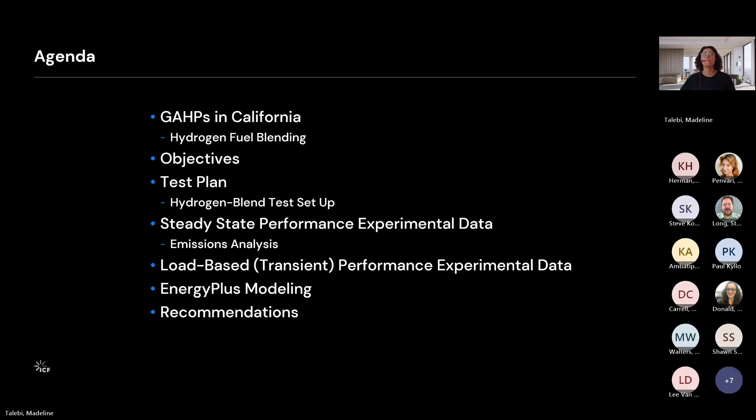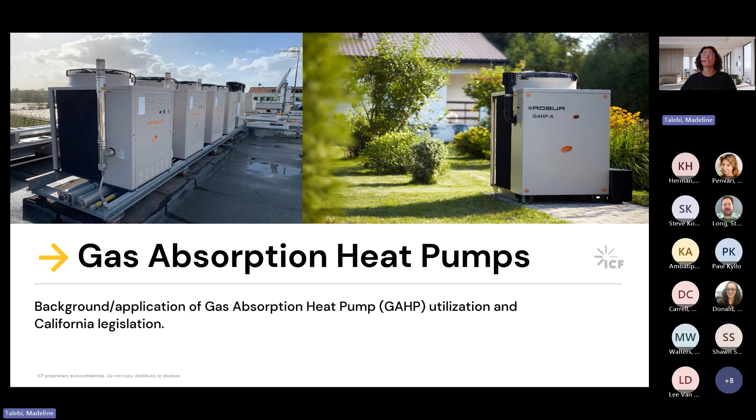So if we look at California on emissions control, why we're interested: if we look at water heating, it is the largest non-industrial end use of natural gas in California. I've broken down natural gas consumption by end use, covering the three sectors: industrial, commercial, and residential. As you can see, industrial has the largest impact, however commercial and residential still have a significant impact in that space, where there could be lower consumption possibilities.

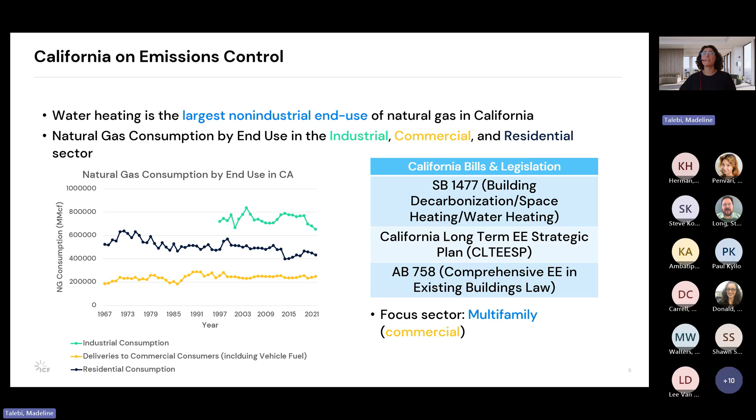And I listed a few California bills and legislation that would lead us to want to decarbonize or lower natural gas consumption in California, along with why we're interested in the focus sector being multifamily or commercial, to spearhead some of this effort, and why we would want to incorporate this into the multifamily sector specifically. I won't go into the details of these bills and legislation, but if you're interested in looking more into them, I have them listed here.

And so when we talk about hydrogen blending, I don't want to make any assumptions. So if I say a hydrogen blend of 5%, that means it's 5% hydrogen and the balance 95% is natural gas.

When we look at hydrogen blending research going on, specifically in California or Southern California, there are some limitations with regards to hydrogen blending, primarily associated with cost. There are several ways that you can harvest or generate or extract your hydrogen, and some are more costly than others. But that research is definitely ongoing as we're looking more towards hydrogen as a feasible fuel option or fuel substitute.

I listed here some on-site max hydrogen blending across various regions, just to give insight into where the world is in this level of research. The US excluding Hawaii is at a max blend of 5%, Hawaii only is at 15, Canada's at 5, Europe's at 20, kind of the leader in this effort, and Australia's at 5. This is from the CPUC, California Public Utility Commission, from 2022, so this might well have been updated, but all this to say that Europe is definitely the leader in this effort.

And through the GET program, we've actually done a study, one of the earlier studies in the program, looking at hydrogen readiness labeling, specifically in the European market. If you're interested in where that study went, that's also available on the website.

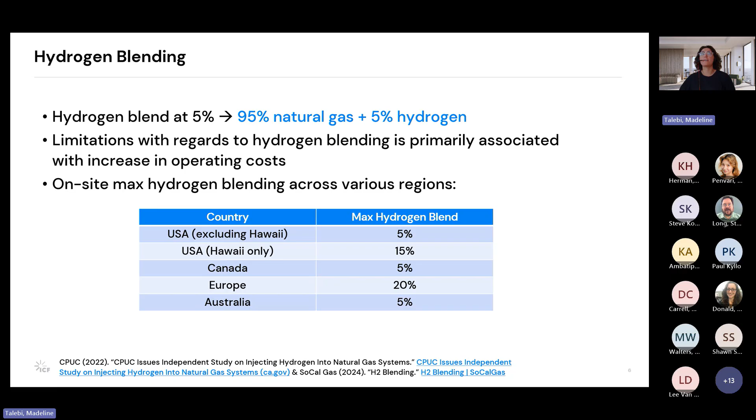Getting into the objectives, ultimately we want to improve low uptake at the sector level. As I mentioned, that's going to be the commercial sector. And we want to improve low uptake at the technology level, specifically in the GAHP space.

Looking at technology performance in a controlled environment, there are really two components of that laboratory study: the steady state performance and the part load or transient performance testing. Then ultimately, we want to look at how emissions will be evaluated with the various hydrogen fuel blends, and finally, developing performance mapping curves that will be contributed towards the EnergyPlus GAHP module.

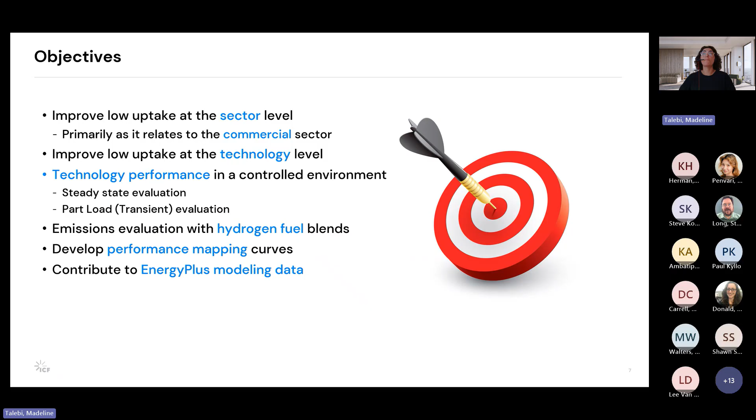I'll briefly touch on the equipment commissioning and test plan for this. Again, it's the Robur GAHP-A system. I've listed some of the commissioning tolerances used: anything that's a rate, so flow rate, firing rate, and heating output, are about plus minus 2%. Any temperatures, so outside air, return, and supply, are plus minus 1 degree Fahrenheit. Following commissioning of the system, everything was in good agreement with what the manufacturer had intended.

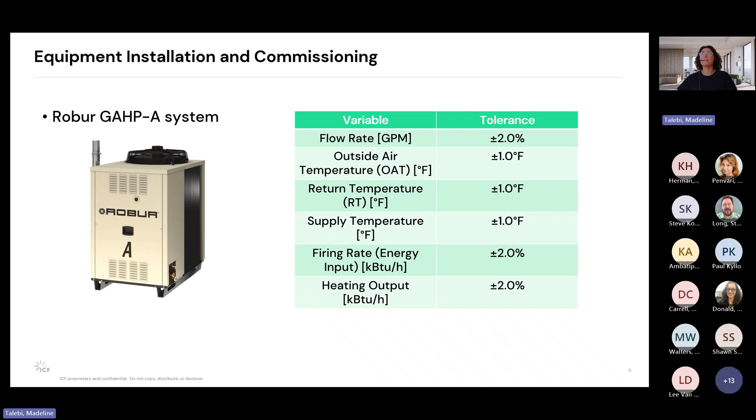For the steady state testing, as I mentioned, there was pretty thorough testing done for natural gas. Given time and resources, this was pared down to really hone in on where we might see some varying trends, or where the meat of the natural gas testing was the most interesting. So this was pared down to looking at one flow rate of propylene glycol at 13.6 GPM.

We used an outside air temperature range from 17 to 90 degrees Fahrenheit, 5 points within that range, and one return temperature at 110 degrees Fahrenheit. Propylene glycol was kept at a constant 35 volume percentage, and the hydrogen blend was between 0 and 30%, essentially looking at 4 points. The 0 volume percent was mainly for emissions, and the 10, 20, and 30 were for emissions and all of the steady state and transient testing.

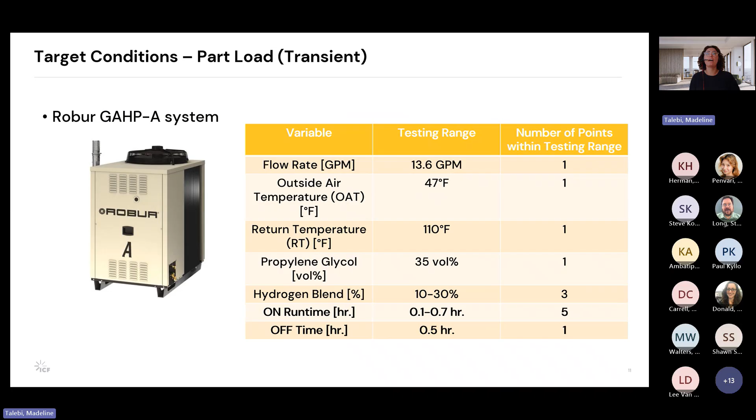For that transient testing, everything was kept constant, same as steady state, just adding that time factor. The on runtime of the cycle, at full fire, was between 0.1 and 0.7 hours, 5 points within that range. The off time was about 30 minutes, just one test point for the off time.

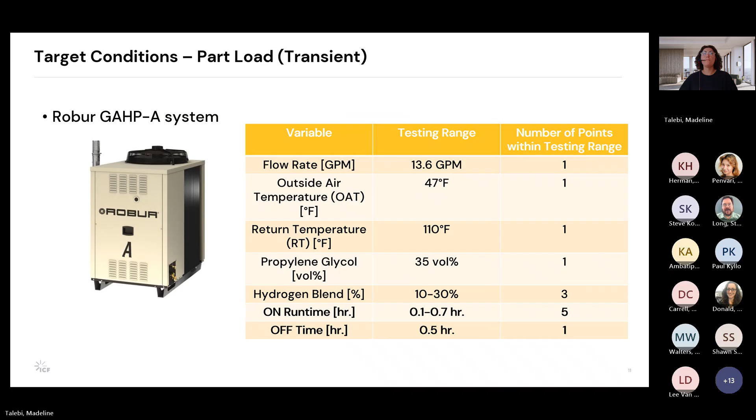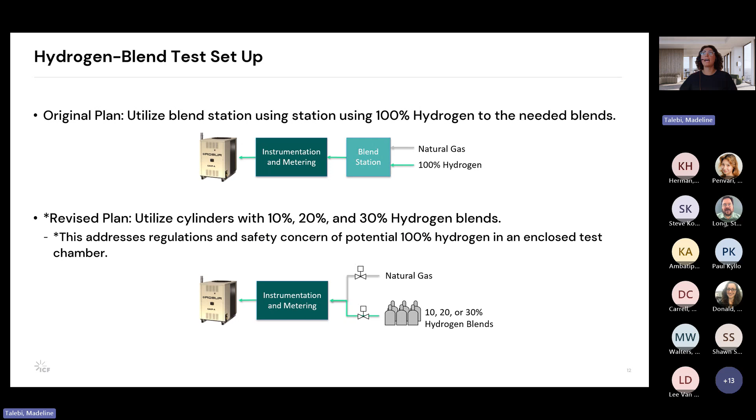I also wanted to highlight the hydrogen blend test setup. There are multiple ways you could go about mixing your fuel for a blend study. The original plan was to take 100% hydrogen with natural gas and use a mass flow controller to manually blend it through a single feed. But given time constraints, GTI decided to just buy tanks that were pre-blended, looking at the 10, 20, and 30% blends.

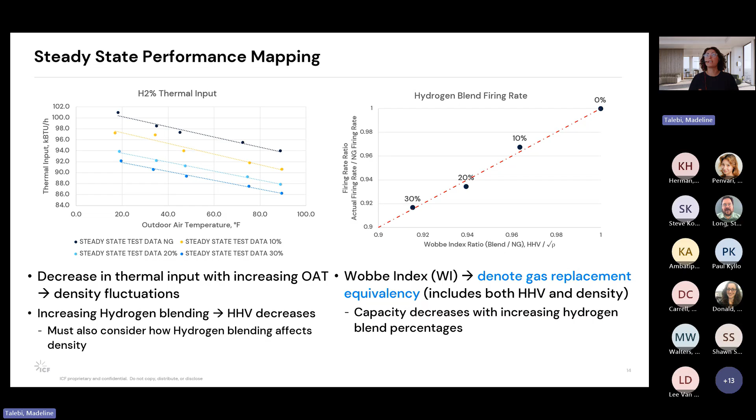One way to look at gas equivalency is to use the Wobbe index, which denotes gas replacement equivalency. That accounts for both the high heating value, shown on the x-axis, over the square root of the density, factoring in the outside air temperature density fluctuations. So looking at the 30% hydrogen blend, this points out that it's at a gas equivalency of 92% of natural gas. It's important that we factor in both the high heating value and the density because we don't want to lose any of the correlations we see with the thermal input graph.

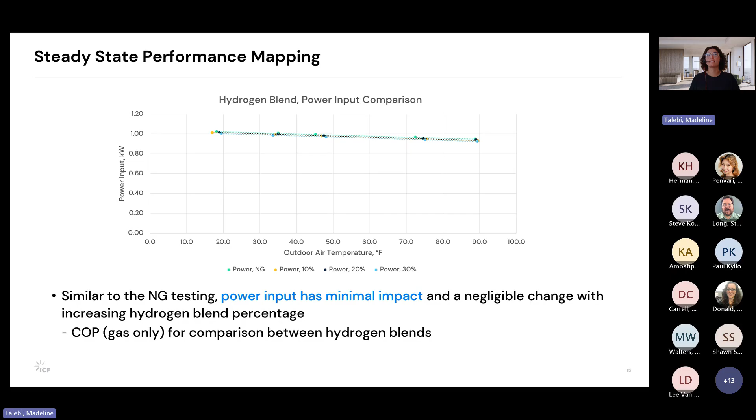For moving forward, I'm just going to show the COP gas only. In the full report, we have both the gas only and the gas plus electric listed, but the differences are negligible.

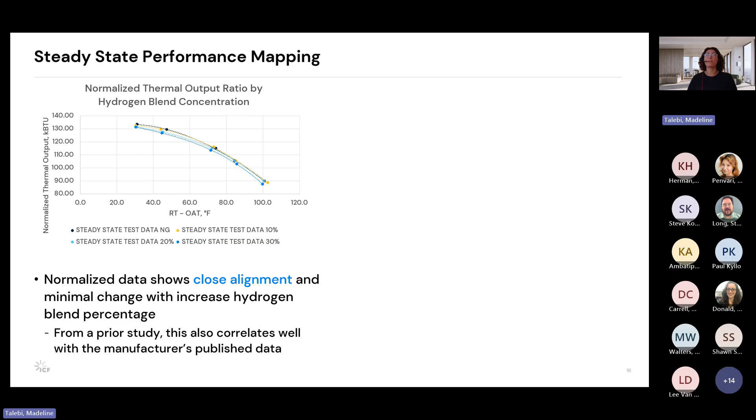Before getting into the COP, I wanted to show the normalized thermal output ratio with respect to the thermal input. As you can see, there's very close alignment between the 100% natural gas, 10%, 20%, and 30% hydrogen blends. When we did the natural gas testing, this was graphed according to what the manufacturer had published. Since we're seeing close alignment with the hydrogen blend, there's virtually negligible difference between what the manufacturer published for natural gas, what the testing showed, and what we're seeing for 10, 20, and 30%.

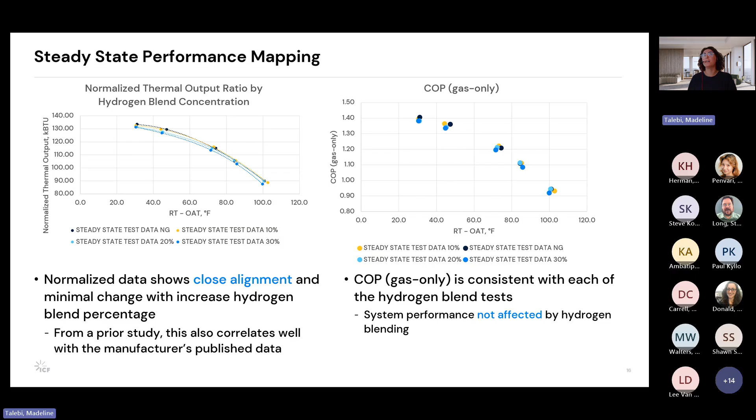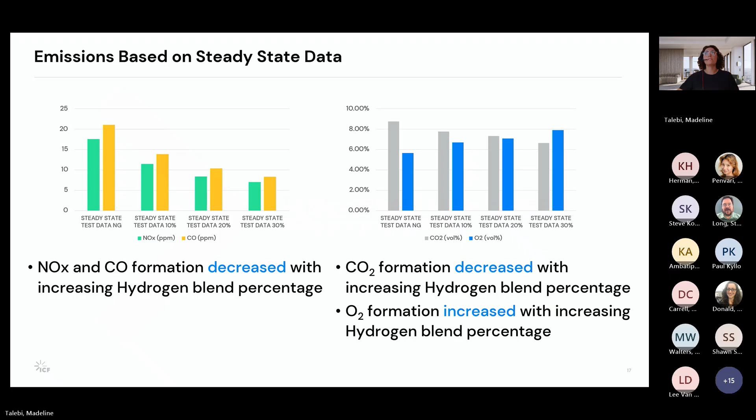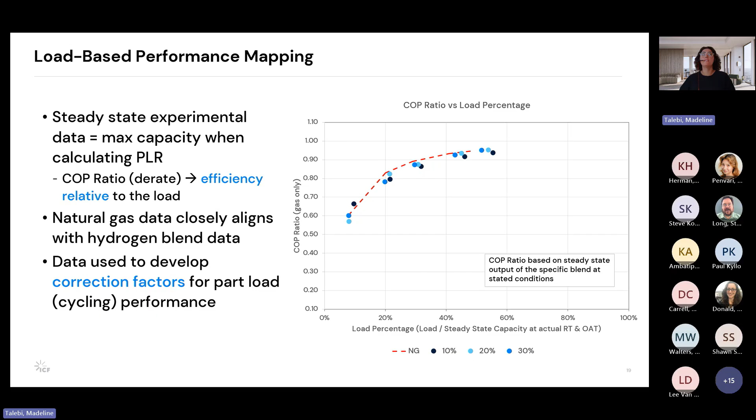I have a lot of parameters listed here, so I'll take this slide line by line. Essentially, each individual modeling parameter was developed and plotted with the experimental data, so the model data versus the measured data, and I'll show how that error compares with one another in the next slide. But it's essentially predicted within plus or minus 5%.

I just listed some of the key parameters. They've been slightly simplified here, but in case you're interested in where this is coming from, I didn't just want to say modeling parameters without listing what this was referring to—that being the heating capacity and gas use and all of the parameters that coincide with what these two encapsulate. This is outlined in more detail in the full report, but I wanted to touch on which modeling parameters I'm referring to and how those were developed or where they came from.

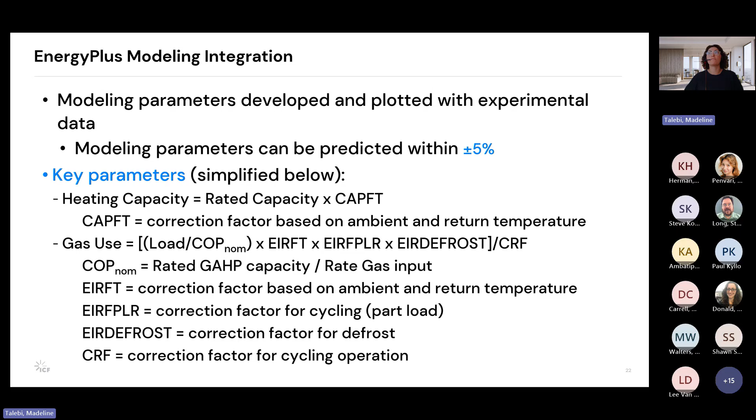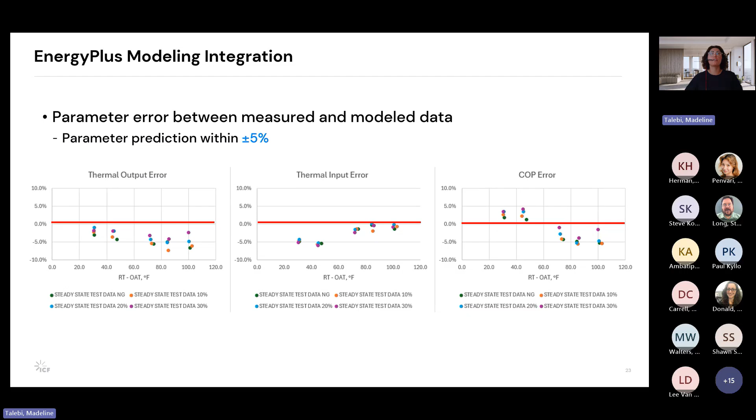As I mentioned, the parameter error between the measured and model data was about plus or minus 5%. I have this red bar highlighted on the 0% axis, and you can see anything that hovers above and below is estimated at about plus or minus 5%.

And then if we look at the overall modeling accuracy based on the COP, again only the gas alone, the error comparison between the measured and model data is approximately plus minus 5%, above a part load ratio of about 25%. As you can see on the bottom, it kind of increases slightly, but nothing of too much concern. I think if you wanted a narrower window, you might increase your testing averages or so forth.

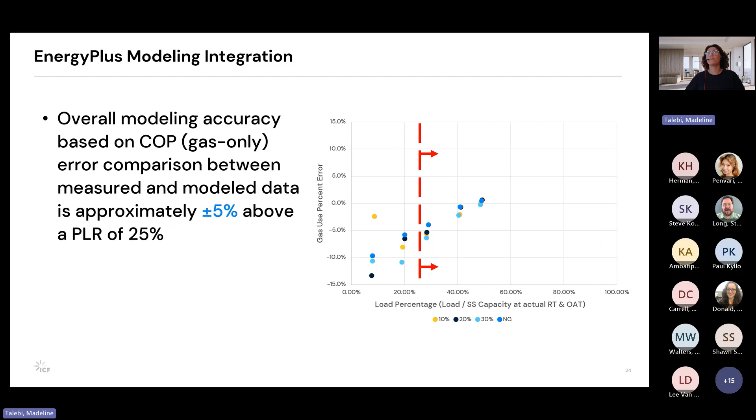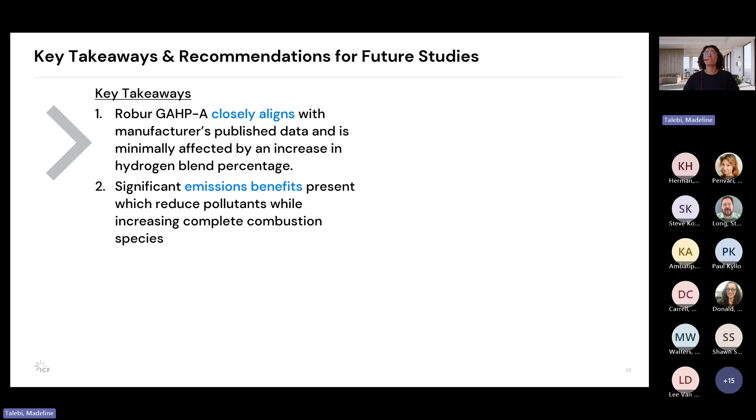And the performance of the GAHP at part loads is mostly independent of the fuel supply, meaning the hydrogen blend percentage. We're seeing an overall modeling accuracy for those performance mapping curves in EnergyPlus of about plus minus 5 to 10%.

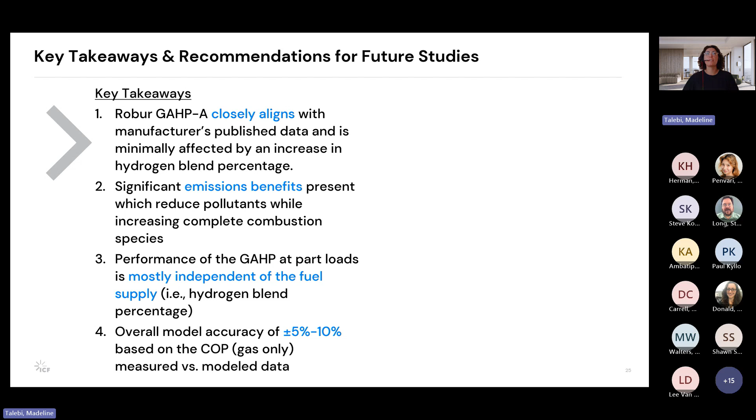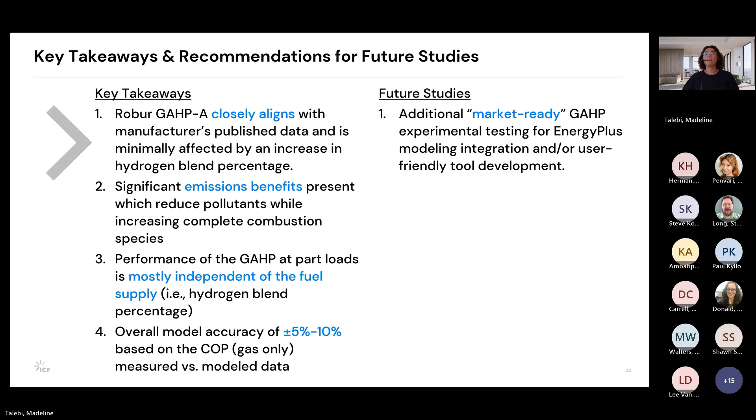For future studies, definitely look at additional market-ready GAHP experimental testing that's currently ongoing, and hopefully look towards a user-friendly tool development that hones in on GAHP research. And that's all I have on my end. I'll take any questions.

Very good, Madeline. Any questions from the audience about GAHP lab testing or modeling? Oh, I see one question in the chat. You see that? Yeah, I'm not too sure how to answer that.

I could take a swag at it. Certainly, potentially gas heat pumps and other technologies might work as a complement to electric or electrification in particular areas. But this is primarily a gas technology, as opposed to other technologies that are sort of hybrid that might switch between gas and electric, or pure electric heat pump technologies. I don't know if that answered the question or not.